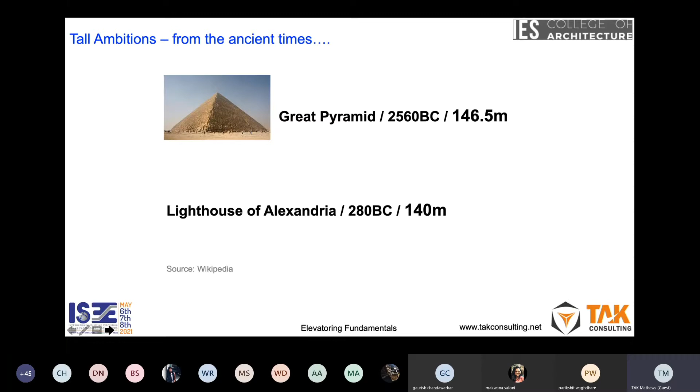And if you look at it from an Indian perspective, we have had tall ambitions too. The Qutub Minar at 72.5 meters was the tallest structure in India till Usha Kiran was constructed, which I believe is at 74 or 76 meters. But even at that point in time, around 1316 AD, there was another structure planned in front of Qutub Minar at 145 meters, which never got completed.

So we seem to have something that continues with us in history. We also have projects that we plan out in India even today which don't get completed.

So tall has always been the case. If you look at prehistoric times, there's a reference in the Bible, and it's referred to in other religious books too. They talk about the Tower of Babel, and what it says in the Bible is: 'And they said, let us build us a city and a tower whose top may reach unto heaven.'

So the point is that tall ambitions have always existed. Let's just have a look at how tall this building could have been. And because it's a prehistoric kind of scenario, we will have to refer to historians or experts as to what they have to say.

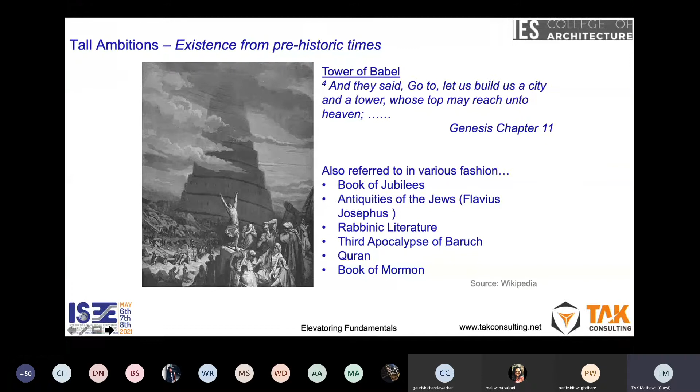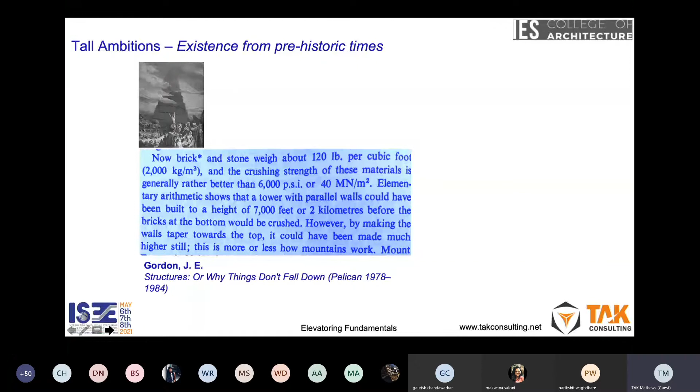So there is a book, Structures, by Professor J.E. Gordon, which says all tall things don't fall down. In his opinion, this building could have been about 2 kilometers high. And in comparison...

the Sky Mile Tower, which they are talking about in Tokyo, with completion expected in 2045 -- I don't know, I'm not too sure I would be alive at that time -- and the Kingdom Tower, which is under construction and was supposed to be completed in 2018 but is still not complete, are all much smaller. So again, the fact of the matter is ambitions have always been there. People have always been constructing.

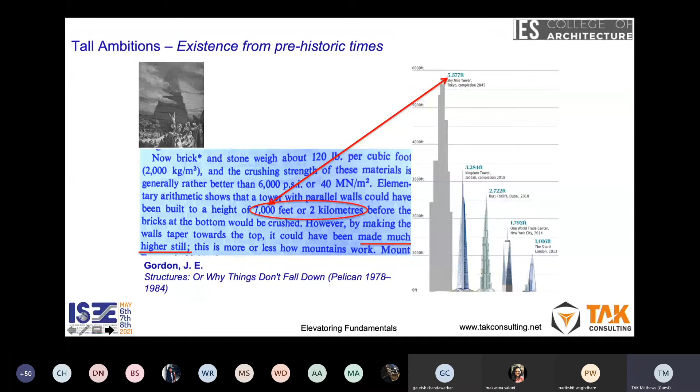So then the question that comes up is, what's the big deal in tall? Visualize prehistoric times -- they were talking about something that was 2 kilometers high. So what's the difference? We have the Qutub Minar, which was at 72.5 meters, and we have Usha Kiran, which went taller than Qutub Minar after close to 500, 600 years.

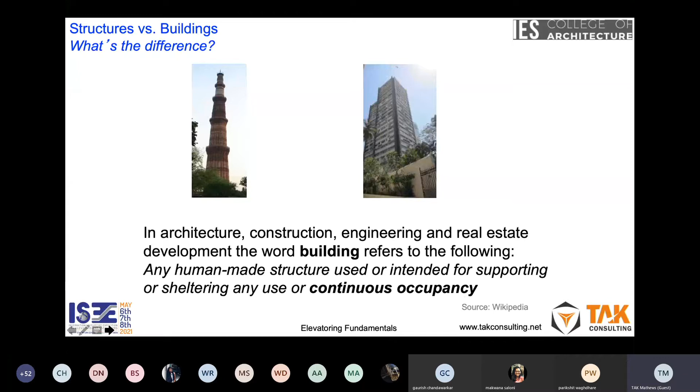So what's the difference? If you look at Wikipedia, it's a difference in architecture, construction, engineering. The difference between a building and a structure is that a building will support continuous occupancy. So a building is definitely a structure, but all structures are not necessarily buildings, because if it doesn't support continuous occupancy, it's just a structure -- just like the Qutub Minar, which is not expected to support occupancy. So what makes the difference?

Again, if you look at Wikipedia, it says that in the 19th century, buildings of over 6 floors were rare, as having to climb floors was impractical, which I think is an obvious scenario.

I do know that many colleges, many schools which are multi-storied, when it comes to elevators, they don't include the students, and the students are expected to climb up stairs, which probably is good for health, but not necessarily the right way of designing a building.

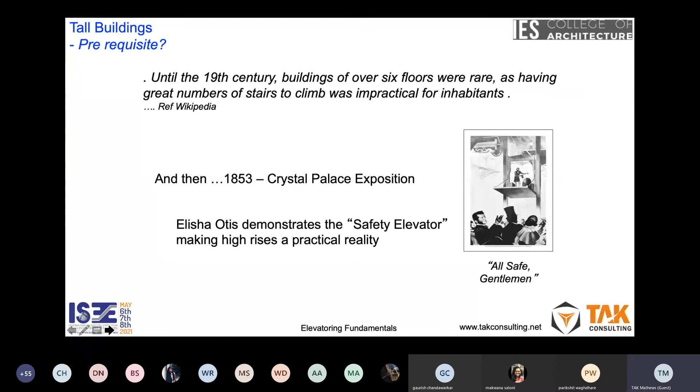Then look at what happened in 1853, Elisha Graves Otis invented the safety elevator. This is an exhibition which happened, and what he would do is get on the platform, cut the rope, and the platform would not fall because he had invented a safety mechanism to ensure the elevator doesn't drop. After 160 years, the same technology, the same approach, the same concept still exists for safety of elevators. For all practical purposes, it's Elisha Graves Otis's invention that made it possible to construct tall buildings, because then people didn't need to.

There is Ms. Chaudhary, I believe, who is asking for control of the screen. Should I? Hello, excuse me, there's somebody who's asking for control of my screen. No, go ahead. Yes, sir, please. Okay, you can see my screen, right? Yes, we can see your screen, go ahead.

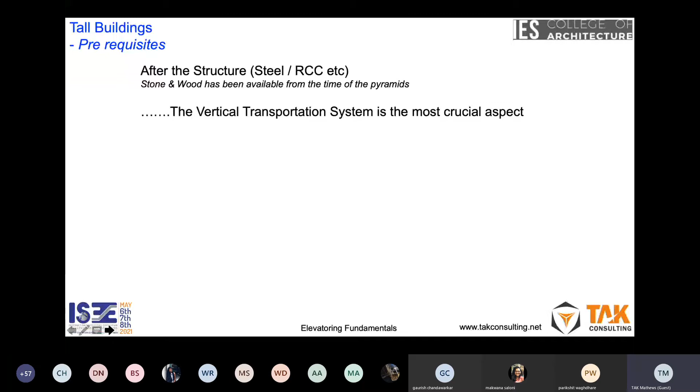So after the RCC and the structure, what is most crucial is the vertical transportation system. Unfortunately, and I say this from experience, I've been a consultant for the last 16 years, I sit through design meetings, and it's a sorry state of affairs where even toilets, horticulture, and landscaping get a higher priority than the elevators. As we go along, I will give you proof as to why I say this and why I would talk about this.

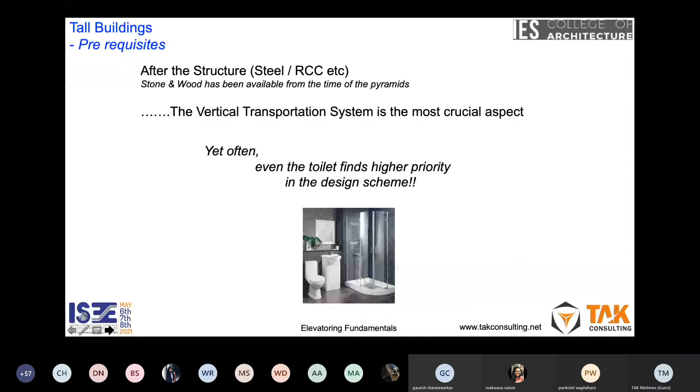I'm a civil engineer by qualification who's got into an electromechanical line, and I know for a fact that if your structure is not right, your foundation is not right, you do not have adequate reinforcement, your RCC is wrong, for all practical purposes you have to bring the structure down. I'm not talking about the old Mumbai area where you can put up a couple of scaffolding and keep the structure up. I'm talking about a tall building.

What would you do if your elevator core is wrong? Can you add elevator cores in a building? Again, I'm not talking about a small building where you put in an elevator between the stairwell or add something externally. I'm talking about a tall building. Invariably, the answer for both is that you have no alternative but to bring the building down.

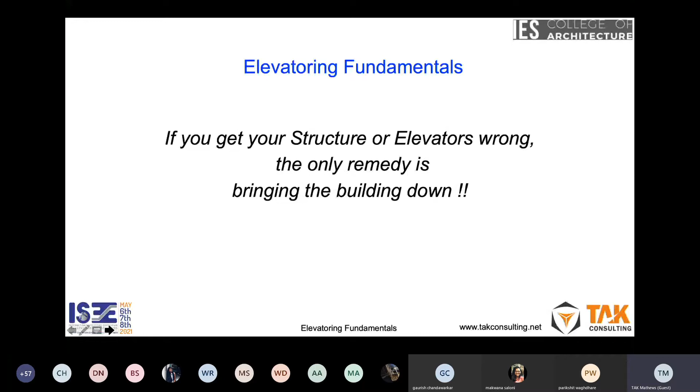So let's look at the cost of inadequate elevatoring. Over the last 6 months, and we do this often, we are approached with cases where people tell us that we have a problem with the elevators, there are long waiting periods, can you do something about it? And in 99.9% of the cases, we don't have a solution.

This is just to give you an example. These are 5 buildings we have been working on over the last 5-6 months, and the client got very upset with us because we didn't have a solution. Look at building 1, 2,700 population, the average waiting time is 323 seconds, that's 5 minutes. Now I know there are people who say, what is so great about 5 minutes? But if you were to convert that in a commercial building into time over an annual basis, you're talking about a cost of about 3 crores every year.

Now, these buildings we are talking about have been in existence for over 10 years, and this is fairly distributed over this city. I've just picked this city as an example. Look at the worst case scenario, 15 crores. 15 crores into 10 years is 150 crores. The cost of that building was probably only 500 crores. So the loss in terms of hours to the tenants, to the people who are there, is in multiple crores. We need to recognize that in these situations, there's really nothing that can be done.

I'm sure I don't need to elaborate as to which buildings these are, I'm sure you've seen them. In February this year, I was part of a panel discussion, and one of the questions I asked was, how many buildings in India actually have a design basis for elevatoring? We had a lot of discussion amongst the panelists, there were some thoughts, and finally we concluded that not more than 10% of buildings in India would have a design basis for elevatoring. More or less, everything is based on thumb rules.

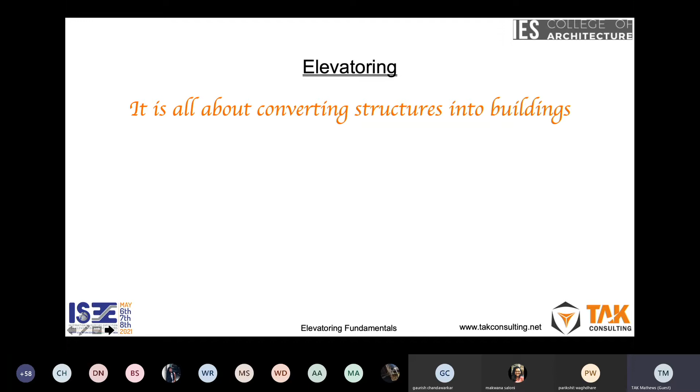Elevatoring is all about converting structures into buildings. Now, as architects, do you want to be just doing structures? Do you want to just build a Qutub Minar, or do you want a building? If you want a building, it is about elevators. And here ends my first lesson.

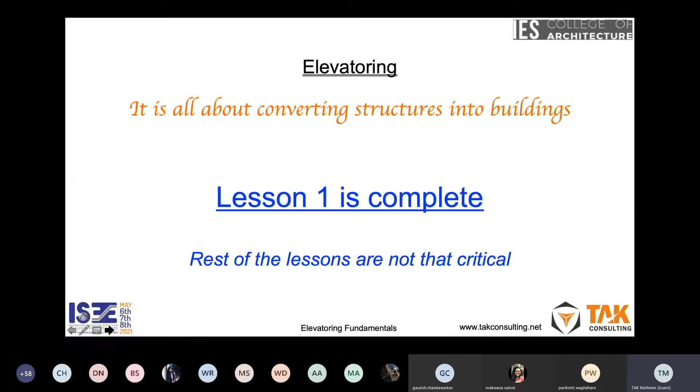If you were sitting face to face in a classroom, I would say that the rest of the lessons are not important. If this lesson has been put across, if I have managed to get this message across to you, the rest of it is not that critical. So if you're at home, you could probably turn on Netflix, the rest of the things are not that critical. This is the most critical. This is 99% of what I would be talking about today. For those of you who are still continuing, I'll get into a little bit more detailing.

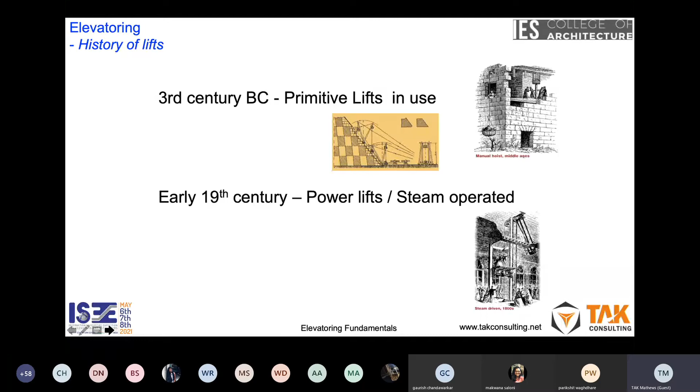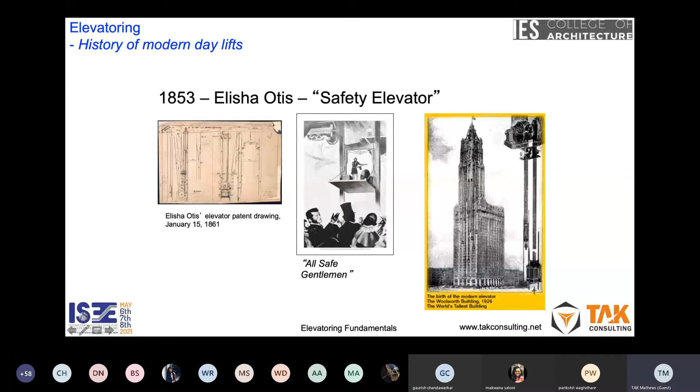History of lifts. Yes, we have had lifts before Elisha Graves Otis's invention. However, they were more for goods than people, because it was unsafe - if the ropes got cut or there was a failure, it would collapse. It is Elisha Graves Otis who made the difference. This is his 1861 patented drawing, all safe gentlemen, and that is where the skylines of this world started changing. There were hydraulic lifts around 1870, 1880, then electrical lifts. Everything slowly started falling into place after 1853 and buildings started getting taller and taller.

Again, a clarification - lifts and elevators are the same thing. The British say lifts, and because we are a British colony, an ex-British colony, we refer to lifts. So if you look at the standards, it's lifts. However, both these are synonymous, and in fact Otis would refer to them as elevators, Kone would refer to them as elevators, and most elevator companies would also refer to themselves as elevator companies and not lift companies. But these are the same thing, makes no difference.

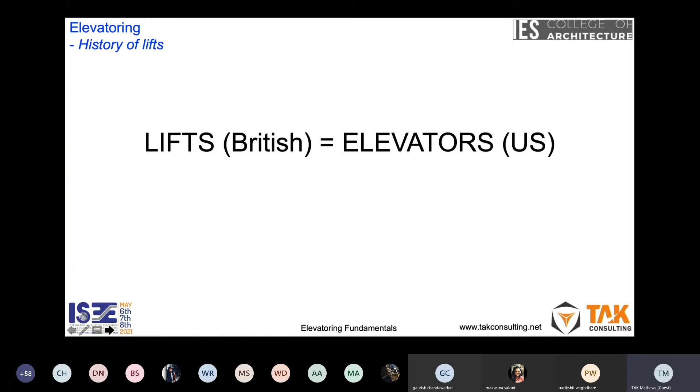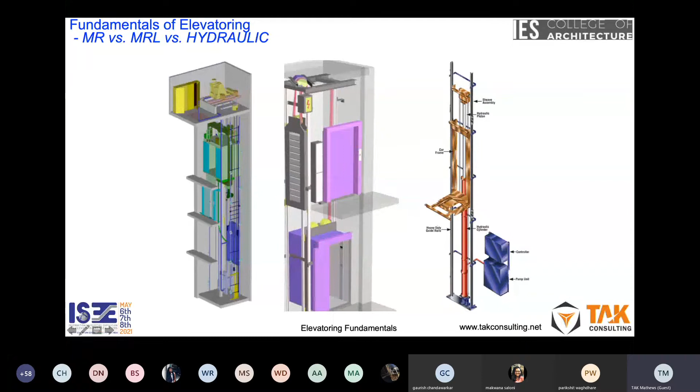Talking about just a few things - on the extreme left is what is referred to as a machine room elevator, where you have equipment tucked up in the machine room. In the middle is a machine roomless elevator, which is just about 20 years old in its invention. And then you have the hydraulic elevator. Now, the difference between these three, their application and pros and cons is something which is a one hour session which I will not be covering today. But it's essential that you understand what a machine room elevator means, what machine roomless is, and what a hydraulic elevator is - all three are very different in their approach.

Some of the components - I know you know the components, but the point I'm trying to indicate is that today, when we put together these components, or when you are designing an elevator or designing the elevator machine room, remember it is not just a question about the functioning of the equipment. We also need to remember that for the next 20, 25 years of the life of the building, this equipment needs to be maintained. So you also need to provide adequate space for the engineers or technicians to be able to maintain the equipment.

So for instance, if you were to look at this machine room, you'll see there's a lot of free space. Can I make the machine room smaller? To get the elevator operational, yes you could make it smaller, but to maintain it, you would need to have adequate space.

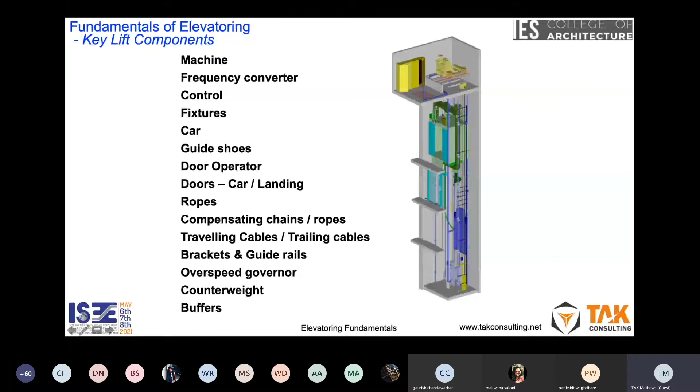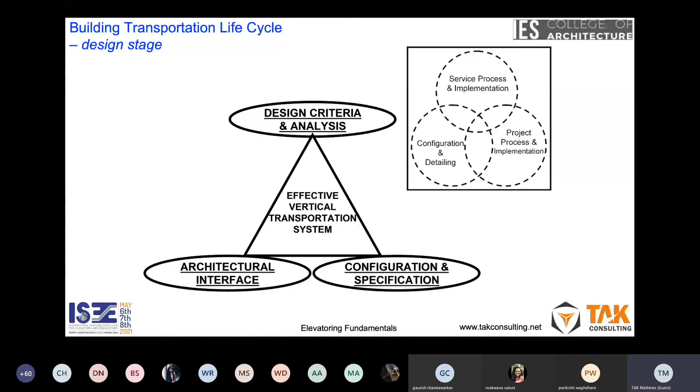So what we'll do is first talk about the design criteria and analysis. Again, remember what I'm talking about - we'll be talking about it from a surface level. We will not be able to go into significant in-depth discussion because of the time requirements.

So if you're talking about the detailing that is required, of course you need to define the building - if it's a hospital building, a hotel, a commercial building, or a multi-use building where you have residential apartments on some floors, a hotel on some floors, commercial - the entire approach is different. You need to be asking enough questions. So often when we get into a design, they say, why don't you give us a checklist? And I'm very, very hesitant to give checklists because checklists box in the answers that you would get. I would prefer a free-flowing discussion to understand what all is involved.

So if you were to talk about a hotel building - whether super premium, where is the location - all these things make a difference. Is it a single tenant or multi-tenant, and of course, try to anticipate the unknowns. There's always this question that comes up - but how can we anticipate the unknowns? But if you ask adequate questions, there are a lot of things that would come out. Could somebody have predicted COVID?

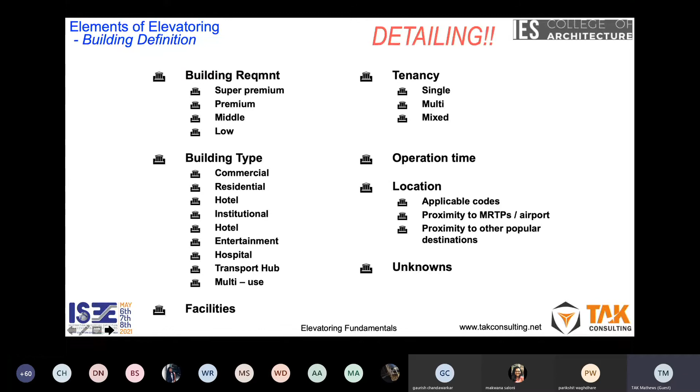Probably not, but there are many things that we can anticipate, and we need to define that. When we talk about population, the number is a crucial aspect, and that is where normally there is a huge gap in terms of understanding. We need to remember that there's a difference between the numbers you would consider for HVAC or floor loading and the numbers you would consider for elevators.

You need to understand the demographic profile, the cultural background. Suppose a building is a residential building being designed in the US, in Manhattan, for instance. It'll be very difficult for them to understand that in India, newspaper and milk get delivered to our doorstep. So if an architect based in the US with that Manhattan experience were to come and design for India, he would not provide for the service staff or the service requirements that we would have. So these are all things you need to consider.

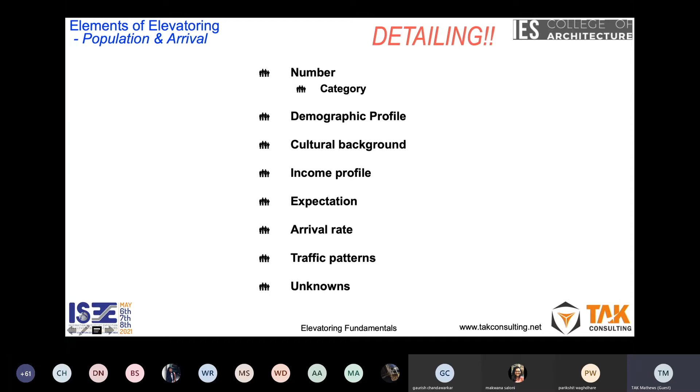Again, unknowns—you need to keep asking questions as to what all could possibly happen. When we talk about material and service, this is mostly ignored. What invariably happens is, okay, we need to provide a service lift or we need to provide something for a stretcher, so let us provide something. But that's not adequate, because you would need to check with MEP, check with the services as to what is the largest equipment in terms of volume and weight that needs to be carried up, and what other equipment do you expect to carry up into the building.

Now, the taller the building, the more difficult it is. Yes, here today we have Mathadi workers who will help carry stuff up, but if you're talking about 70 or 80 floors, even the Mathadi workers would probably have a problem. My daughter plays the piano, and on her 15th or 16th birthday, my mother presented her a piano, and we struggled to get it up into our 4th floor apartment. So these are the things you need to keep in mind. Remember, as I keep saying, if you've designed it wrong, you have to live with it for the life of the building.

Okay, now let's get into some parameters that are used. I refer to this caution—this is Dr. Gina Barney. She is probably 80 years plus, a lady who has devoted her life to elevators. She was an electrical engineer, and her book, The Elevator Traffic Handbook, is virtually a Bible for traffic analysis and design of elevators. And she makes it very clear that just because you've read the book, you will not become an expert. You need to spend time to understand the theory, which is very complex.

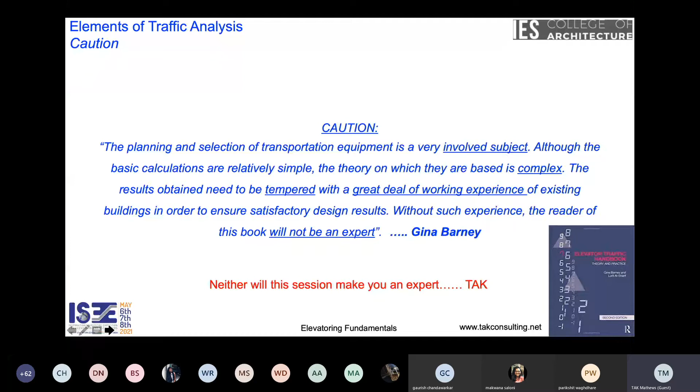It's not a thumb rule basis that you can establish elevators. It's not that you toss a coin up in the air and decide. It's not that you say that building had 3 elevators, so let me do 3.5 elevators here. No, there is a lot more that goes into establishing elevators. So I add a little to what Gina Barney has said—this session will also not make you an expert. It'll just give you an indication of the questions you should probably ask or what you need to be aware of when somebody gives you a traffic analysis report or design basis report for elevators.

So there are 2 things which in the classical mode are always talked about: handling capacity and interval. I do not know how many of you are aware of this, but let me take you through it. Handling capacity, simply put across, is what the elevator system can handle in a specified time with a specific average loading.

And the specific time interval is invariably 5 minutes. 5 minutes because it was a convenient thing - 2 minutes is too less and 10 minutes would have been too long. So 5 minutes is considered as a standard, and the average loading is considered to be 80% or less. Interval is the time difference between 2 elevator departures.

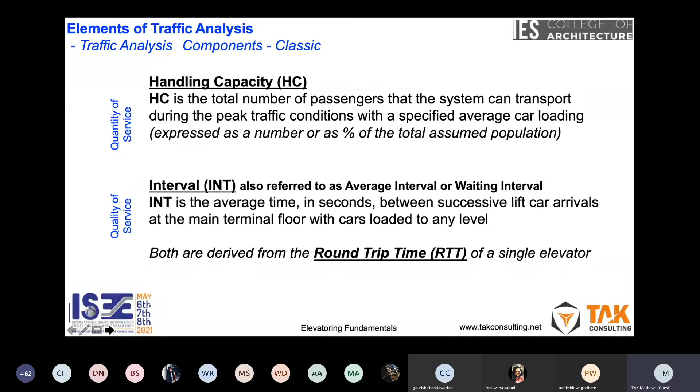We will come to that again, and recognize very clearly this is not average waiting time - this is the time difference between 2 elevator departures. Both are derived from the round trip time. This is the classic approach that has survived for more than 60 or 70 years now, and it is the only way we can do an apple-to-apple comparison between 2 calculations or 2 buildings.

So the round trip time formula - don't try to mug up this formula, try to understand the components that are involved, what makes the difference. So you have 2H. H is the average highest reversal floor, and S is the average number of stops.

So why is it 2H? It is that the elevator has to go up and come down, so the time that it takes to go up and the time it takes to come down. Now TH is the time that it would take for a single floor transit. So if the average floor is 60 and a half, it would be 60 and a half into the single floor transit time.

S plus 1 - S is the average number of stops, and 1 is that the elevator goes from the lowest floor, the acceptance floor, then goes up and stops at all the various floors, and then comes down. So that is the S plus 1, and TS is your door operating time and the loss on account of each stop.

Then 2 into P into TP. P is your average passengers that are carried, and invariably it has to be 80% or less. One, it is from a formula perspective. Second, we need to remember that when we talk about elevator loading, we are talking about 68 kilos per person. So somebody like me is definitely more than 68 kilos, so if you were to design on 100%, you'll invariably have a problem.

Now the 2 into TP, the transfer time - the 2 is people going in, that is 1, people coming out, that is 2. So that is the 2P. So you recognize, the more number of floors, the higher is going to be your impact on account of H, higher is going to be the impact on account of number of stops. And larger the car, higher is going to be the impact of people ingressing and egressing from the car.

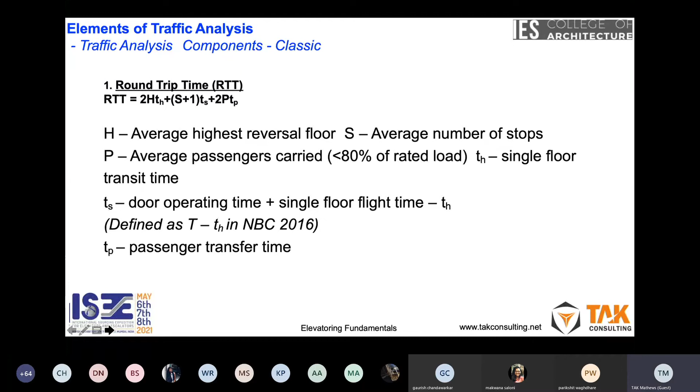So H and S are statistical functions. Again, please don't worry too much about this formula as such. If you're ever interested, please refer to Gina Barney - her book is pretty detailed. In fact, I keep saying even today that if I have a little bit of a problem sleeping, all I need to do is pick up that book and start reading, and it puts me to sleep very fast.

Again, what you need to remember is what are the implications. So higher the building, the more number of stops, the bigger is the impact of H. Higher your car capacity, bigger is the impact of the probable number of stops. So for instance, if you have a ground plus 1 building, the number of probable stops is 1, your H is going to be 1. If you have a 1 passenger elevator, again your probable number of stops are 1.

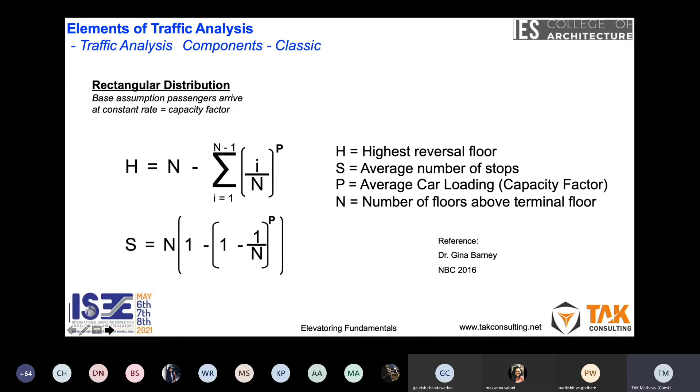So you need to recognize that these are all an iterative process - more stops, you have a problem; larger the capacity, you have a problem. And you need to ensure that this is balanced. H and S, obviously, it is not a function of speed. It is not a function of your door opening or door closing time, because it is just a function of your average car loading and your number of floors.

So if you were to take the number of floors as 20, and suppose we have a 10 passenger elevator with average loading at 80%, you have 18.2 possible stops. Reversal floor will be 18.2, and your average number of stops will be 6.7. So irrespective of who calculates it, H and S will not vary because it's something that can be extracted from our table. There could be differences on the rest of the components.

Because I could anticipate and say that, well, this building is of older people so they will take more time to ingress or egress - maybe it's an old age home. Or on the other hand, it's a college institute where people will be snappy in getting in and out.

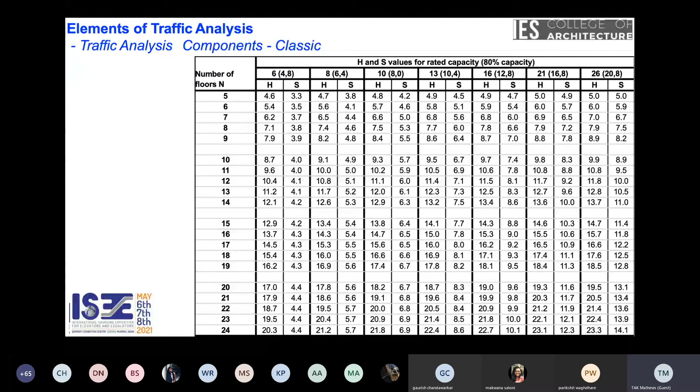So there could be a difference in your time components or your time assumptions, but it cannot change. This particular aspect cannot change.

So from round trip time, where do we get into? We do the up peak handling capacity. It is 300, 300 seconds, that is the 5 minutes divided by round trip time, which means in 5 minutes, how many times can the elevator go up and down into your average loading, into L. And this is expressed as a percentage of your total population.

And your interval is the round trip time divided by L. Now, what is key here is that, again, remember, these are statistics. These are all permutations, combinations, probabilities that are involved. It is the number of lifts in the group. So if you have 8 lifts in 2 different corners, your interval is not round trip time divided by 8, but it will be round trip time divided by 4.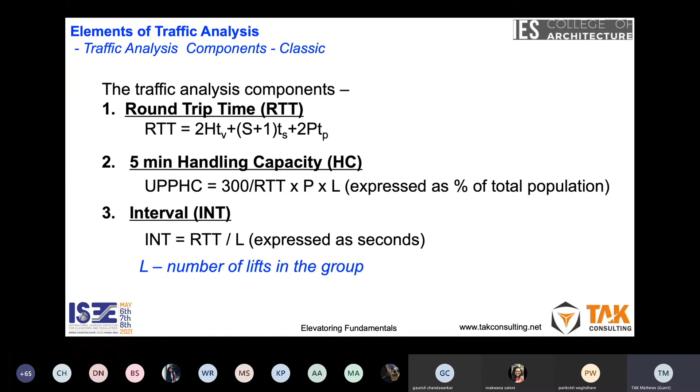Keep this in mind when we often have had this problem where we come up with a recommendation saying that we need 8 elevators. The architect, from a perspective of how the building should look, divides his 8 elevators into 3 different corners or 2 different corners, and then we end up having a problem because it doesn't give you the same results.

So it assumes it's a pure up peak. That means the people are picked up on the ground floor and then they are rushed up to the upper floors. They drop off at the upper floors and the elevator rushes back immediately. Even if there are 3 people who decide to go from an upper floor to an intermediate floor, we have a problem. It's assumed as a rectangular distribution formula, which means that every time the car is filled to an average of 80%, which again we know doesn't happen.

It's always a bell curve. Floors are equally populated - again, that is not the case. And the floor heights are equal.

So the reason why I'm saying this is you need to remember that when you do the traffic analysis, there's already an idealism that is assumed. So if at that point of time we say that, okay, let us compromise a little on the basis of the traffic analysis - like say, for instance, I need a handling capacity of 10% and say, no, we are okay with 8 to 9 - we need to remember that the 10 itself has been arrived at based on an ideal assumption.

Things that we need to remember: handling capacity is what the system can handle. Arrival rate is what will actually happen in terms of people reaching the building. Unfortunately, in the elevator industry too, there are people who interchangeably use this. Remember very clearly that what we need to achieve is a system that can handle so much, and so many people arrive, and what we should try to do is try to ensure that this is matched.

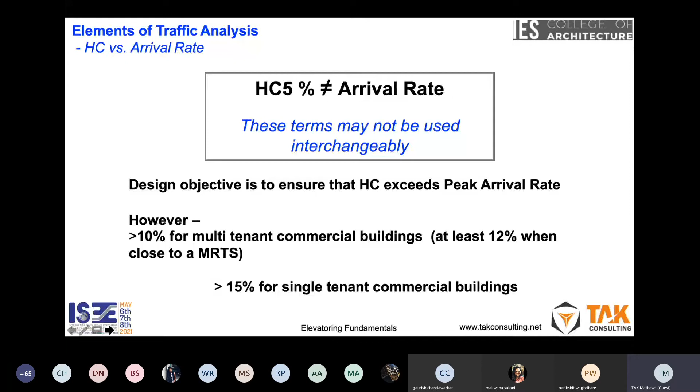And if it's a single tenant building, definitely it has to be more, because the possibility of a diverse arrival rate is going to be significantly less. So these are things - I'll just come to this particular thing in terms of what everybody asked for: a quick look into interval.

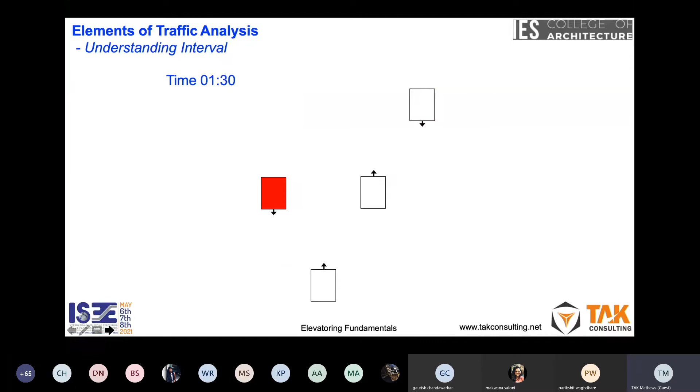Remember, it's again a statistical function. So if you focus on the red car: 30 seconds to go to the halfway point, 1 minute to get to the top point, and then 2 minutes to come to the bottom. So if you were to look at it from that perspective, the round trip time of the red car was 120 seconds. Because there are 4 cars, you divide by 4 and you get an interval of 30 seconds.

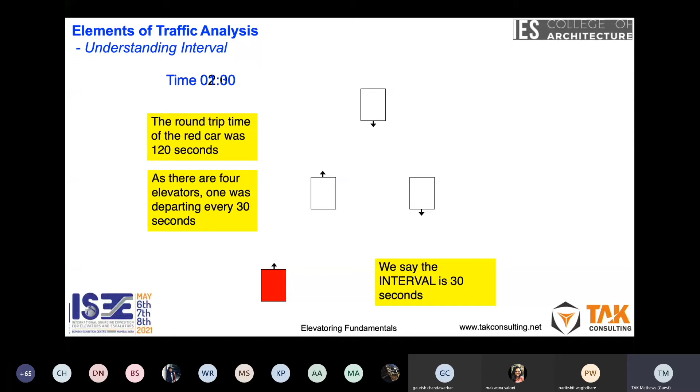The reason why I'm showing this is for you to understand the difference between interval and average waiting time. The interval is the time difference between 2 elevator departures as an average. So if you were in a scenario where you didn't have enough elevator cars, you could have an interval which is very good, is awesome, but then you have an average waiting time which is higher, with people still waiting in queues. The classic example we have would be the Cuffe Parade and Nariman Point area, where you have smaller cars and the interval is very fast, elevators come down, but you are still waiting in a queue.

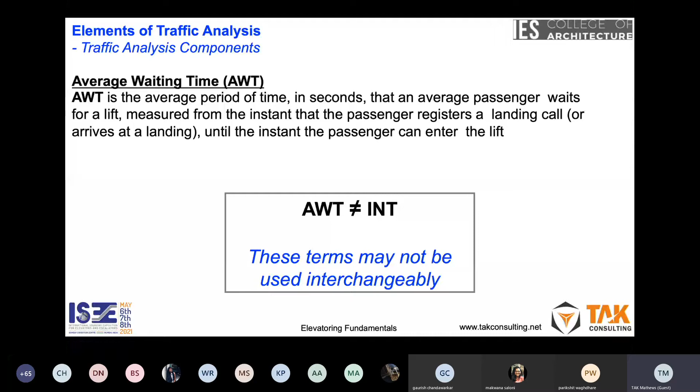We need to recognize that the average waiting time is not the interval. This is often confused. Interval is the time difference between two elevator departures, while average waiting time is the time somebody will have to wait after the first button has been pressed - if it's a conventional system with up and down arrows - or after the person has arrived at the landing, assuming the button has already been pressed.

Just to understand how it works, we calculated the conventional classical way - the handling capacity and the interval. Now, how does that apply to a person?

So if we have two people arriving, Raghu arrives, Anita arrives, and they push the button, the elevator comes in. If you look at it, Raghu's waiting time is larger than Anita's waiting time. This is what invariably happens. Anita should be a happy lady because she had to wait very little. But Raghu's time to destination is lesser than Anita's, because Raghu is on a lower floor, and Anita's time to destination is larger.

So the reason I'm showing this is because we might do the calculation and find that we have a good acceptable handling capacity, a good interval. I do a simulation and establish what the average waiting time is, and it looks good. But we also need to keep our eye on the ball in terms of the time it takes to reach a destination, especially when we are talking about tall buildings.

So everything falls into place, but you still need to go back and check how much time the person takes to reach the destination. And often, for a taller building, that might be your clue for establishing the elevator speed, not just the handling capacity and the interval.

The relationship between interval and average waiting time is not understood at all, and people interchangeably use it with serious consequences. I gave you an example of Nariman Point. If you were to say that the interval and the average waiting time at Nariman Point are equal, the answer is no. The interval is good because the elevator cars are smaller, but the average waiting time is much higher because people still wait.

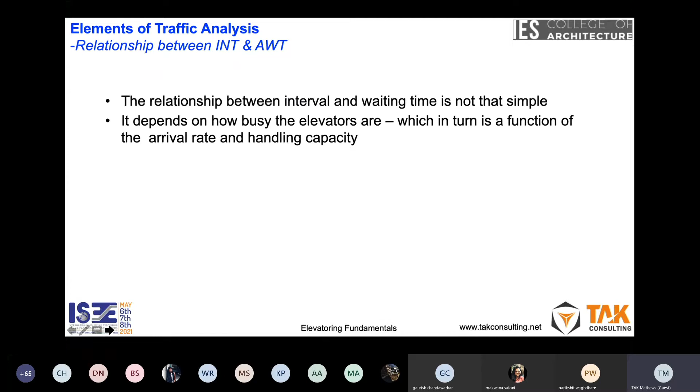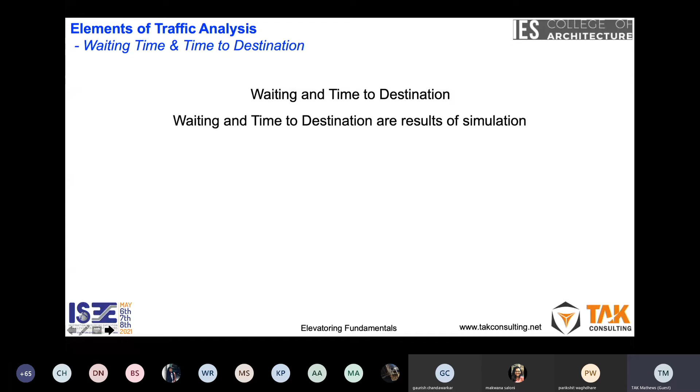The way to arrive at your waiting time and time to destination is through simulations, and today you have excellent simulation packages. However, we still need to work on handling capacity and interval as our base. For the simple reason that when you talk about simulations, it's not based on formula - it is based on algorithms, which could vary depending on the software person. And with software, the problem is garbage in, garbage out. In any case, we need to remember that assumptions and the right interpretations are key.

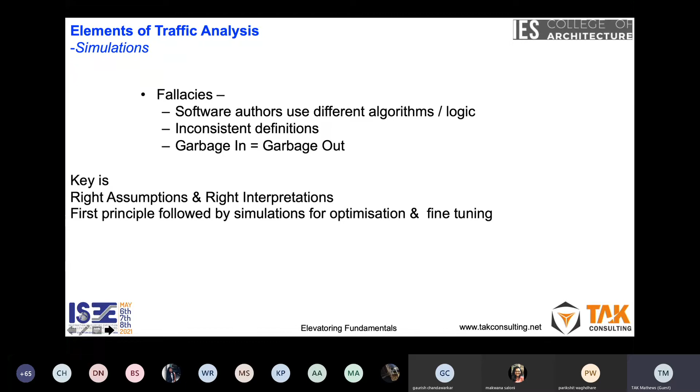So again, looking at the National Building Code, we have a process laid out which, I understand, has now been copied by some code writers in Europe. You go through the whole process: establish the building, set out the target parameters, do the peak analysis, establish the number of elevators, then do an optimization. You fit it into the building and see if the areas have changed. If the floor area has not changed, you're good to go. If it has changed, you'll have to go back. This iterative process has to always be followed.

I have often been asked, but we are still at the conceptual stage of the building, so we have no idea - just give us some idea of elevators. For a smaller building, it's possibly workable, but the taller the building, the more difficult it is to do, because the consequences could be huge.

If you're talking about a building of, let's say, 40 or 45 floors, and we have to establish the number of elevators, a population difference of 150 could mean an additional elevator. On the other hand, if it's a smaller building, a population difference of 300, 350, 400 would probably not make too much of a difference. So there is nothing like an estimated number of elevators for a conceptual design. From the first instant, the taller the building, the more you have to get into detailed calculations to establish what you require in terms of elevators before filling it into your architectural plans.

The crucial input is population. We need to be very careful about it, because if your population assumption is wrong, whether overstated or understated, both ways we have a problem. If you look at the National Building Code, it does give you some guidelines, but it's still best that you understand what the building requirement is.

Just NBC 2016 recommendations: for multi tenancy the minimum required is 10 to 15%, while single tenancy is 15 to 25%. The reason is that in single tenancy, the diversity of arrival rates would not vary as much as in a multi-tenancy. The recommended average waiting time for a premium and a regular building is also different. For a residential building, handling capacity for high-end is greater than 8%, mid-end is 6 to 8%, and low-end is 5 to 7%.

Those of you who know NBC 2005 know we had a standard handling capacity for all types of residential buildings, which was 7.5%. We did this breakup because we realized your density for residential buildings, depending upon the level of the building, could vary. A high-end building at 7.5% with lower density would throw a lesser number of elevators, while a low-end building with higher density and higher average handling capacity would end up with more elevators than required. So we've done a breakup on it.

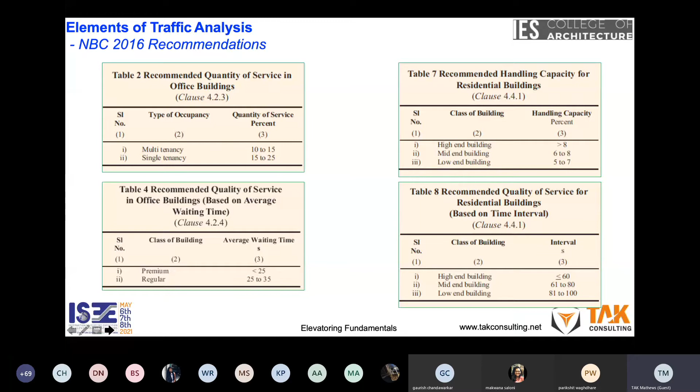Interval has been defined as 81 to 100. Please remember clearly, this 81 to 100 is not your average waiting time, it is the interval. So your handling capacity has to be met, and if you have this kind of interval, you are okay. But for a high-end building, if you have an average waiting time of more than 35-40 seconds, your resident is going to be very upset.

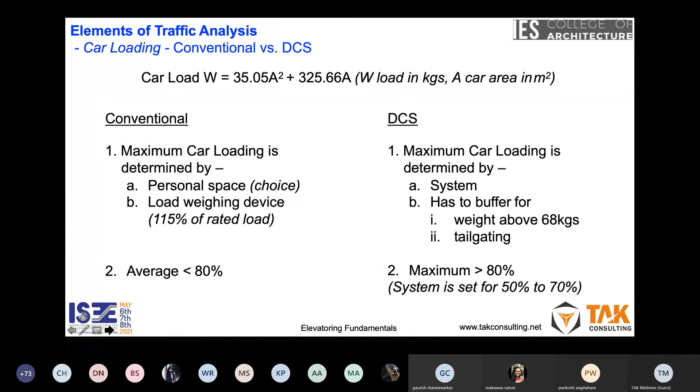However, do not worry too much about it, but remember that in destination control, your maximum car loading is more than 80%, while for conventional, your average car loading is 80%. So keep this in mind. You do not always have an advantage with destination control systems. The reason I'm saying this is that as you start working, somebody will say, okay, with destination control I'll take care of the whole thing. The answer is no, it doesn't work.

We had COVID coming up, and I conducted a number of sessions during this period, and there was a request saying we need to change the National Building Code to account for the pandemic scenario. My response was that if we have designed the building well from the first instant, COVID or no COVID, we do not have a problem.

If the building was designed at 12.3% handling capacity, even in the worst case scenario where you can load only 4 people into a 20-passenger elevator, you'd still have a waiting time of more than 2 minutes, which is still bad. But if you have a constraint on the number of people that can go into the elevator, you obviously have a constraint on the number of people in the building too. So if your building has been designed well, COVID or no COVID, you do not have a problem. On the other hand, if your building has been designed badly with 5.5% handling capacity, you already have a problem, and with the COVID scenario, your problem gets escalated even more.

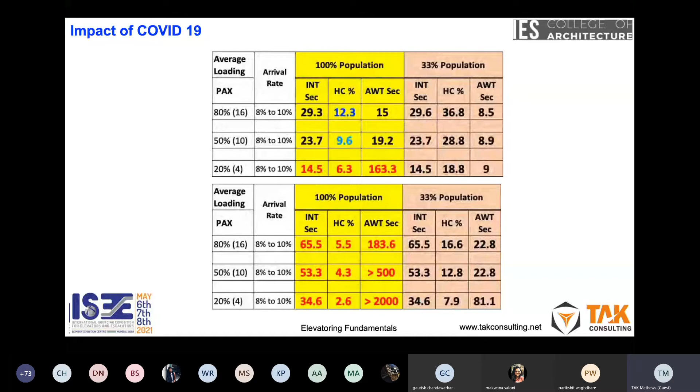So there is really no need to change the National Building Code as far as this is concerned. All we require is that we follow the National Building Code norms. Some of the errors that happen are people ignoring the criticality, missing out on population numbers, and ignoring the NBC 2016 provisions. Almost every other project, we come across architects who say NBC 2016 is just a recommendation, so we will not be following that.

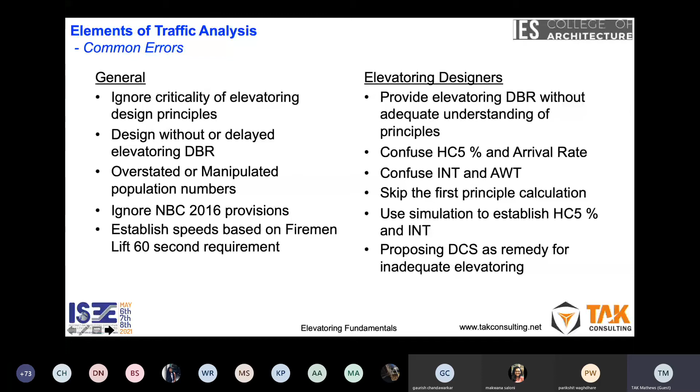Unfortunately, even when you look at it from an elevator company perspective, many of them do not understand the fundamentals. So the whole complex situation is we end up with buildings that are badly under-elevated. Designers and developers who don't allot the priority required for elevators see it as a nuisance. Combined with people from the elevator industry who also don't understand it, we end up with a very critical situation.

Once you have established a number of elevators, you need to do the architectural interface. Pay attention to this clearly: when you talk about elevators, it's about the number of stops and openings. We normally say if it's ground plus 7, it's a 7-story building. But remember, for elevators, the number of stops and openings need to be clearly mentioned. So for a ground plus 7 building, it is an 8-floor building, not a 7th floor building.

Remember that. Dimensions of hoistway: width into depth. Width is when you look at the hoistway left to right, with your arms stretched out. Depth is perpendicular to where you are standing. Unlike architectural drawings, where it depends on horizontal versus upright, for elevators it's always defined as width into depth. So if you are doing an X by Y, always remember it is width into depth, not how the hoistway is positioned on your drawing.

On the other hand, if you're just showing the dimensions, there's no problem. But if you are showing X into Y, it should always be width into depth. I've faced situations where architects have given a dimension based on how it appears in the drawing. We brought the material to site and realized it didn't fit because the way it was put across was different.

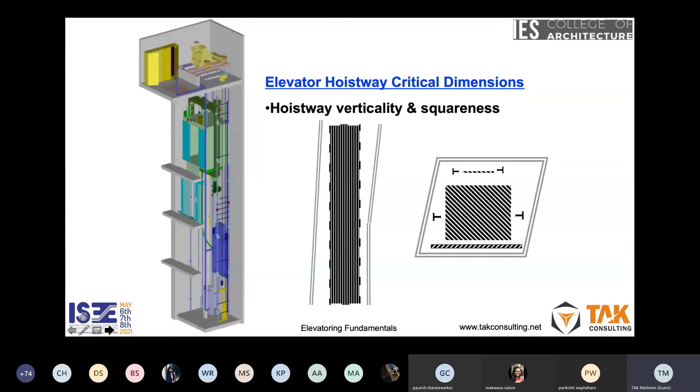Remember there are rough finish entrances. So if you want a taller door or a taller car, you need to keep in mind that there is other equipment that requires to be maintained. So if your door height is 2100, a clear opening of 2100 won't do. It will need to be more.

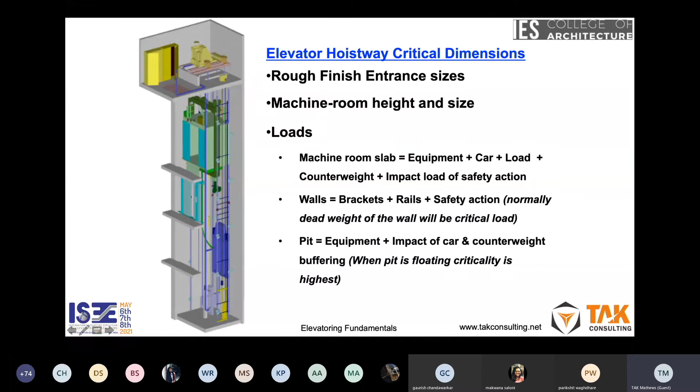The loads on the machine room are a component, a function of the various equipment that goes in. Walls normally tend to be the dead weight, but we still need to be careful because there are brackets, there is rails, there are safety actions that could happen. Similarly, a pit again has loads that we would need to be aware of.

Car dimension and shape - we have an FSI-driven design process that happens. So to get that free FSI, they say, okay, let us have a deeper car so that we get the entire space below. We need to remember that a deeper car is inefficient. Murphy's law will invariably apply, and the person who will get out will always have to be the person at the back, which means everybody has to troop out and then troop back in.

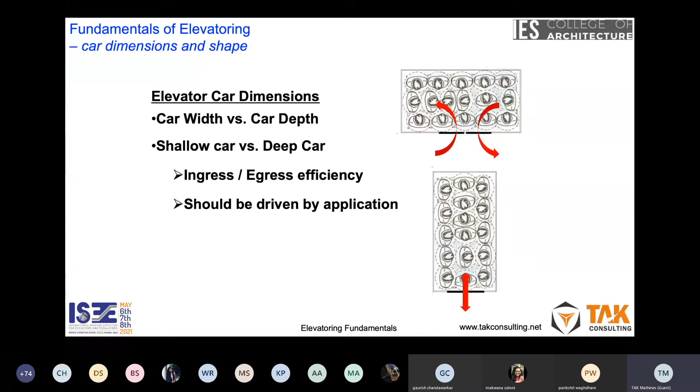Remember our formula of 2 into P into TP. When we are doing the analysis, we are assuming that a person will enter in and will ingress and egress only once. But if you have a deeper car, the possibility is that there will be more number of ingresses and egresses that happen. So keep that in mind. Yes, FSI is all good, but remember the 150 crores that we did analyze and say that if your elevating is bad, the complications that are involved.

The car area is defined by a formula, and the way it works is that the larger the car, the lesser the area per person - it is not linear. The idea is to ensure that the car doesn't get overloaded, and this formula is applicable whether it's in the US, Japan, India, or Europe. This is the formula that comes in, and these are the things which normally decide your hoistway dimensions.

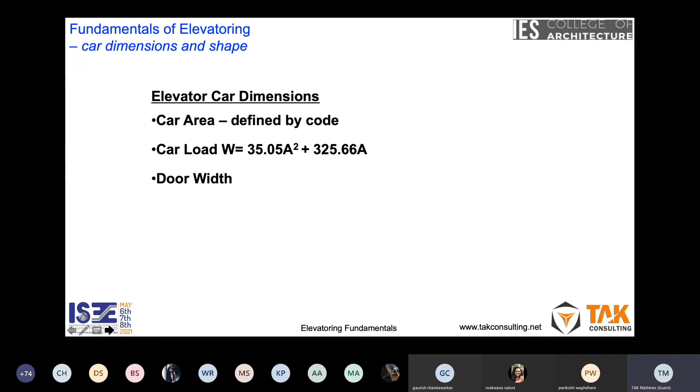In terms of how you position the elevators, remember what I said. If 3 elevators are required, there are 3 elevators in a group. Bear this in mind, and they have to be such that you don't need to be PT Usha jumping over hurdles to be able to approach the elevator that comes available for you. This is again from the National Building Code - if you have 8 elevators, I would strongly recommend that on your main floor you should have it open from both sides, because if you have 8 elevators, the crowd is that much larger and it would need a larger lobby. But the arrangement is very, very crucial. With destination control you have a little bit of flexibility, but the closer the elevators, the better they are for grouping.

So we don't talk about grouping - this is a building that is already existing in India somewhere, and in all the wisdom, this is how the architect has done the hoistway. You can see from the way the hoistways have been done - first of all, 2075 into 1925. Clearly it's a wrong way of doing it. It should have been 1925 into 2075. Incidentally, we were the consultant on this project after the building was two-thirds of the way up, and I was told the hoistway was 2075 by 1925. I made the specifications, and then I got the drawings in hand. I realized that the dimensions given to me were wrong.

So error number 1 is in the way the dimensions have been given. Error number 2, this is a 40-floor building, and if you have a hoistway of 1825, eventually you will effectively get a hoistway which is about 1750. In this case, the construction accuracy was so bad that 1825 actually became 1600.

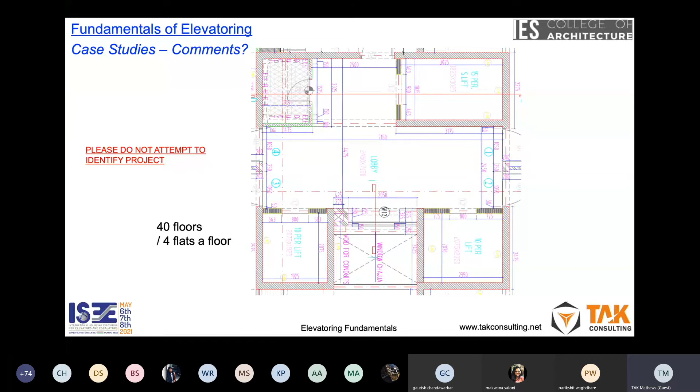1600 is what we managed to get as an effective hoistway size. It's obvious that not too much thought had gone into what was required in terms of elevators, because grouping these 3 elevators together is difficult. If you look at the hoistway sizes, you can see that these have all been fixed to accommodate what is convenient to everything else that has been designed. After everything was designed, suddenly somebody decided, okay, we need elevators too, and then they put them in wherever they could fit.

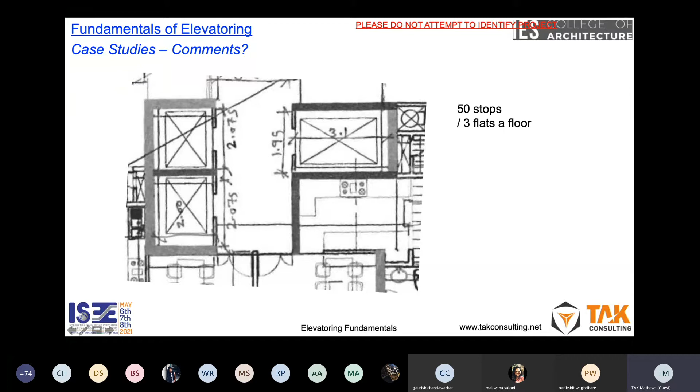This is again a building which we refused to work on. This is how the drawings were given to us, for a 50-floor building. 1.95 will obviously turn out to be 1.75, and the way they had given me the drawing and the way they were constructing the building, we realized there wasn't too much seriousness, and for a 50-floor building, this was grossly inadequate in terms of elevators. This building is complete now, and I keep a tab on it, and I understand the residents are very, very upset with the developer, because they invariably have problems with the elevators. Capacity is less, hoistway sizes are less, the elevators are inadequate, and they really do not have a calculation for deciding on the number of elevators.

So for tall buildings, it's a very tall perspective. Always bear in mind that the complexity is exponential. I had a developer who had done a lot of 10-story and 15-story commercial buildings, and now they are doing a 42-floor commercial building somewhere in India. Finally, we had to excuse ourselves from the project, because their only way of looking at elevators was saying that, in the 10-story building we put in 3 elevators, so for a 42-floor building we should be okay with 9 or 12 elevators. While our calculation was showing that you required 20 elevators.

His 10-floor building he had done at 1.5 meters per second. So he said for the 42-floor building, we should be okay with 4 meters per second. Our requirement was a minimum of 6 meters per second. So we need to recognize that the complexity is exponential.

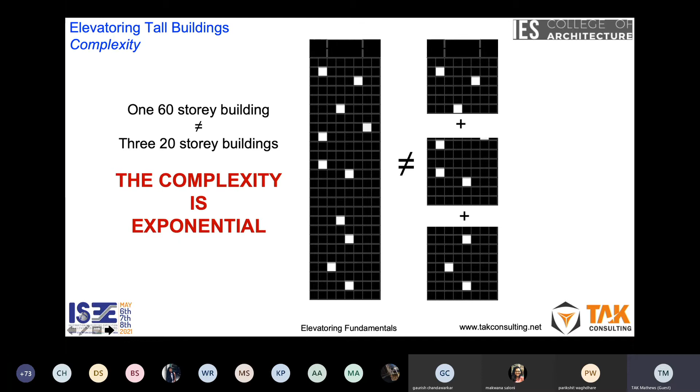An example I would give is, if you had to go from here to Delhi, you would either take the Rajdhani or take a plane. You would not venture out in a car or an auto rickshaw. Unfortunately, in many instances, this is how we approach buildings. We need to recognize that as the building grows taller, your core will eat into the building. In Burj Khalifa, I understand the core for elevators and services accommodation takes about 50% of your footprint. This is something you cannot do anything about. The taller the building, the more you require in terms of elevators. And what the developer requires in terms of larger floor space and what you require in terms of elevators is conflicting.

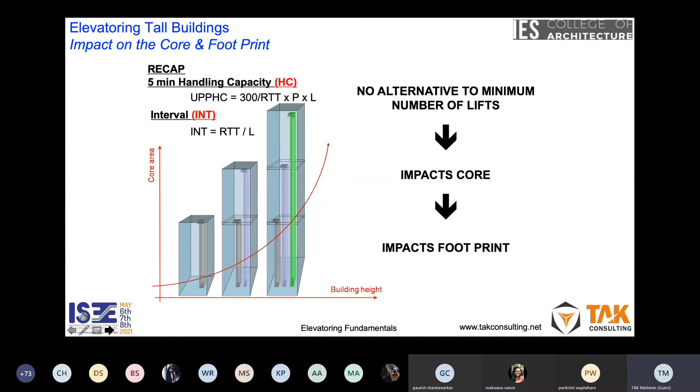Remember this formula: as the building grows taller, you need to look in terms of a fast train, local train, vertical zoning. So if you had to take a plane to Delhi, you would take road transport to get to the airport, and you would not expect the plane to come to your residence. Or if you had the Rajdhani, which starts from Bombay Central, you would go to Bombay Central using some other means of transport, and then you would go. So typically, you would not have elevators serving all the floors.

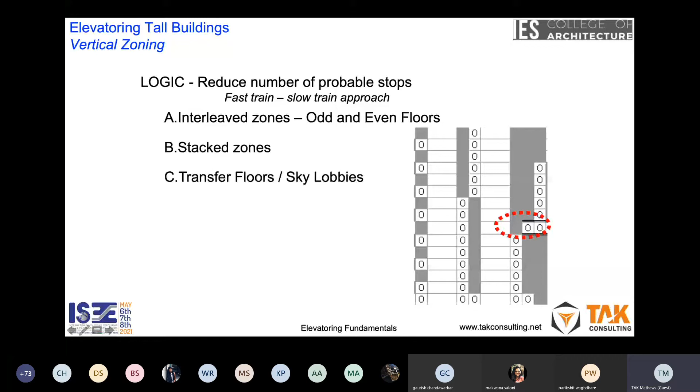I'll give you a few examples of what could happen. You would internally split the elevators, you would have sky shuttles. Rather than just describe this, let me show you a few examples. You could have sky lobbies, elevators serving only upper floors or lower floors, you could have stacked zones, which is exactly what happens in Nariman Point or Cuffe Parade today. That's not a great idea, because people at the lower floor will push both buttons and decide to walk one floor below.

Some of the equipment available is a double-deck elevator, which is two floor elevators attached to each other. Typically, for this to work, the floor-to-floor height has to be fairly exact. Though you do have an option of flexible double deck, you need to remember that there is a time involvement.

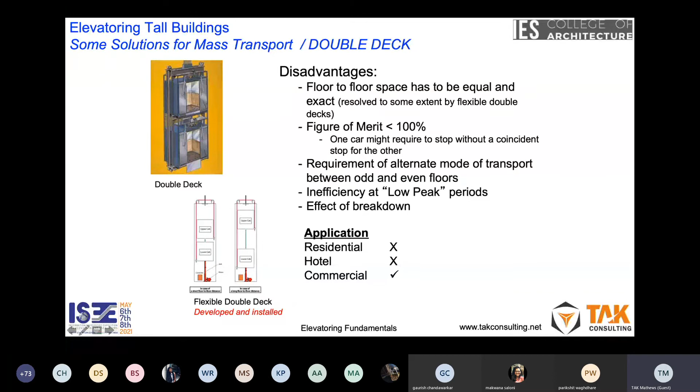The moment you have this kind of flexibility, it takes even that much more time for your stops and starts.

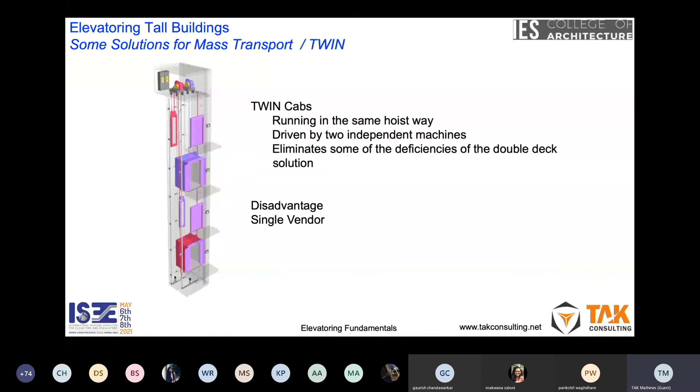There is something else called a twin, but unfortunately the twin is two different machines in the same hoistway. Unfortunately it is still a single vendor who has got it, so it has not become very popular. In addition, there are some violations of the code which happen because it has to be electronic safeties, and your standard safeties do not always work.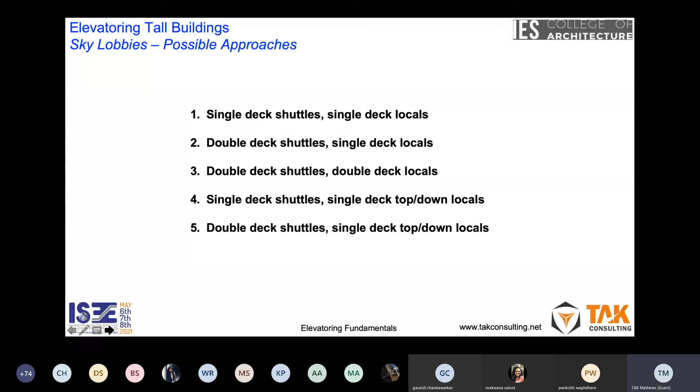Okay, some of the things we talked about - single deck shuttles. So for taller buildings, some of the options are single deck local, double deck shuttles, single deck locals. Instead of just going through it, let's look at the examples.

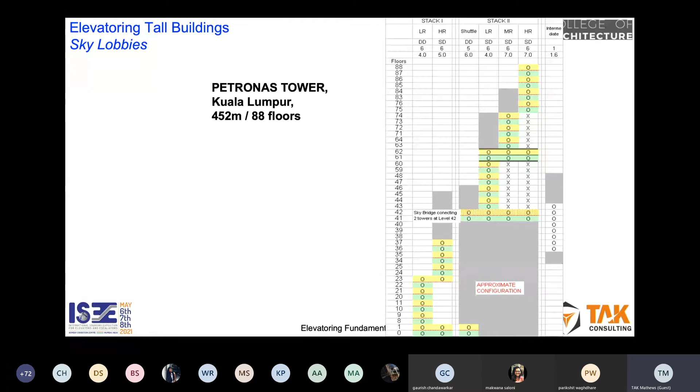If you look at the Petronas Towers, it's a total double deck alternative. So if you had to go, let's say, to the 61st floor, you would express to the sky bridge here, and then take the elevator, the lower or the upper car, to go to the floor you require. When you have this kind of double deck situation, you obviously will need alternate means to travel from your lower floor to the upper floor, because the upper floor car will not come to the lower floor. So escalators would also need to be provided.

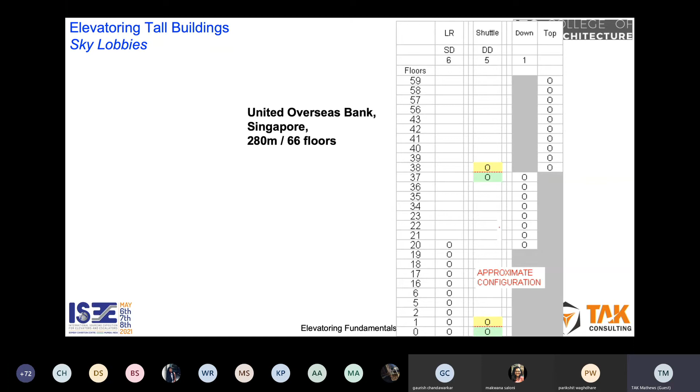This is the United Overseas Bank. Again, if you want to go to the 56th floor, you would take the express till here, and then transit to these elevators to go to the 56th. And here, if you want to go to the 36th floor, you would take this and then take these elevators. This arrangement is not preferred a lot, for the simple reason that going down, people often feel bad that they've had to go up to go down. But sometimes this is the only thing that works out.

Shanghai Financial Tower, again, is a double deck alternative where you have to take double decks to get to your particular floor, and then from there again transit into double deck elevators.

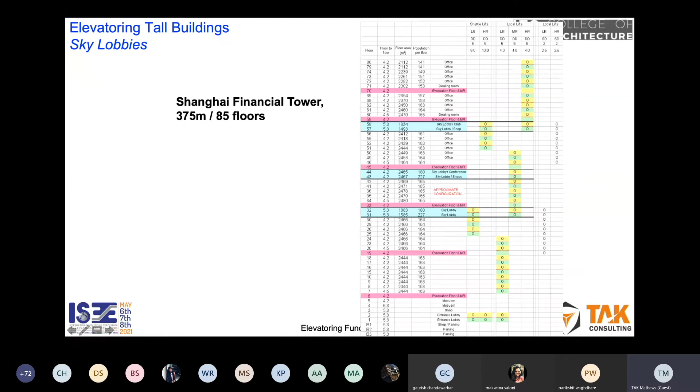So with speeds, there's always a problem in terms of acceleration and deceleration. There's a limit - it's not like we can have any speed. Obviously everybody wants more speed, and today the fastest elevator is 20.5 meters per second, and remember, that's only in the up direction. Followed by that, the 16.83 and 10 meter per second elevators have been in existence for a very long time.

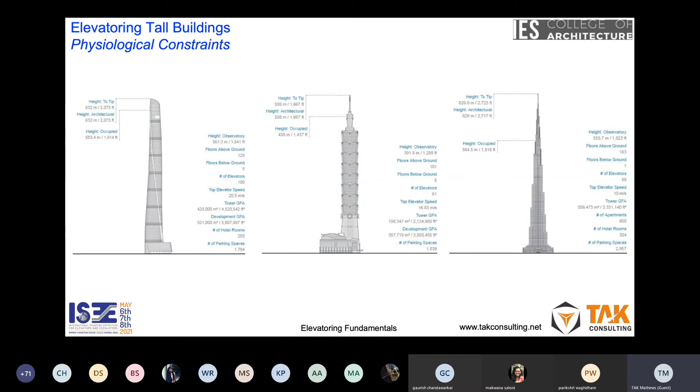Even in the Burj Khalifa, you don't have a single elevator that goes through all the building - there's always a transit for everything, so there's no elevator that goes through all the floors. One of the primary reasons for this is the weight of the ropes. For Burj Khalifa, some of the elevators which travel the longest distance, the weight of the rope is far in excess of the weight of the car.

So when we talk about buildings, we talk about construction accuracy - always remember how critical that is. Squareness has to be considered. There's also the wind tunnel effect: the higher the speed, if you have a closed hoistway, you have a problem. So always either provide for significantly larger hoistways, or ensure the intermediate walls are not there - the partition walls should be perforated, or not there at all, and you just put in steel beams for your brackets. In any case, remember, do not refer to standard hoistway dimensions. Depending upon the building, for a tall building, you will need to get into exact details.

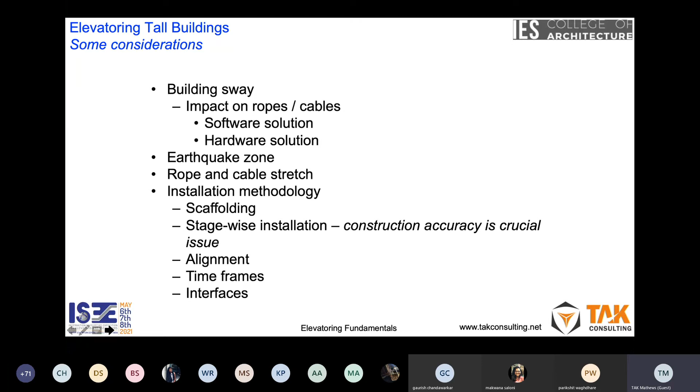Other technical things that you need to consider: the building sway, you need to ask about that. Earthquake, what is the earthquake zone? You need to be looking in terms of what the installation methodology is. You need to plan on what it is. It's not just like a smaller building. You really will need to plan on how you do it.

Building floors, the finishes. If you're going to be doing wet cladding with architraves, it's going to be even much more difficult for a taller building. So if you're going to do cladding, let's say, on the 50th floor, remember that slurry goes all the way down. I would strongly recommend that it should be dry cladding, that you look at that kind of situation.

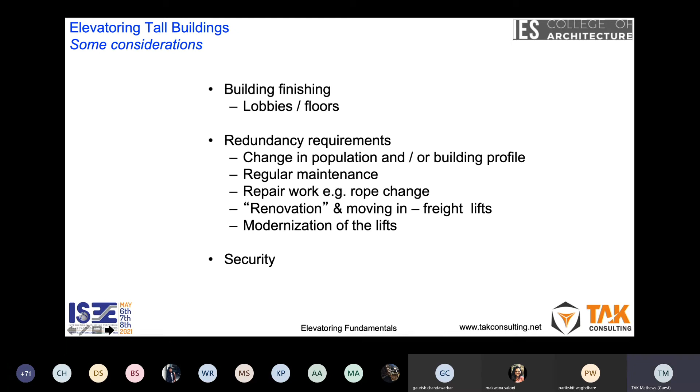Redundancy requirements always need to be kept in mind. The taller the building, the more complicated. Even regular maintenance takes that much more time, so your elevators will be shut down for that much longer. Security again becomes a concern. And remember that despite all your protection equipment that you have for an elevator, there's nothing that can be done to stop tailgating.

Okay, so fireman evacuation elevators, I'll rush through this. I will not rush through this. The rest part I'll rush through.

Remember always that elevators are not waterproof or fireproof. I'm starting with waterproof. Water will kill it first. But because of the fire-resistant doors, it is fireproof to some extent. And it's an architect's role to ensure that the elevator is protected from water, fire, and smoke. Again, if you look at the National Building Code, Part 4, they sort of give a good idea as to how it should be like.

Again, a question that will come up, probably over the next couple of sessions that you do, there will be this question about hoistway pressurization. If you do look at the National Building Code again, this is Part 4, not Part 8, Section 5A and 5B. It says that in the eventuality you don't have an elevator lobby, that the lift opens up into an open area, or an air-conditioned building where it's an open corridor, like it opens up into a flat, then you might need to consider hoistway pressurization.

Otherwise, hoistway pressurization in many ways is a superfluous requirement, because what will first impact your elevator is the water, then the fire, and the last thing is the smoke. Unfortunately, most of the buildings, the design focus is on pressurizing of the hoistway, which, like I said, is superfluous, in addition to which it has a potential of creating problems. One of the requirements that we have for hoistways is to have a smoke window for extraction of smoke in the eventuality there is a fire inside the hoistway.

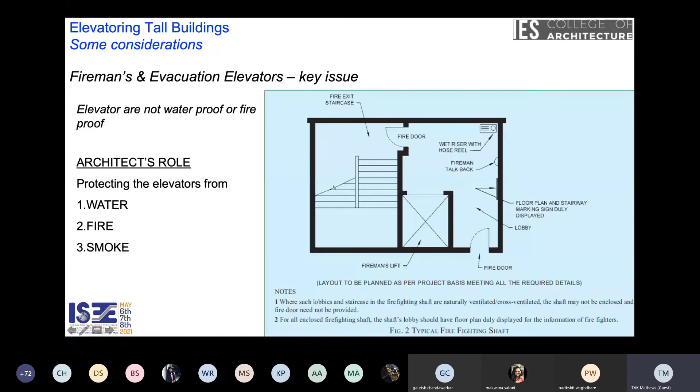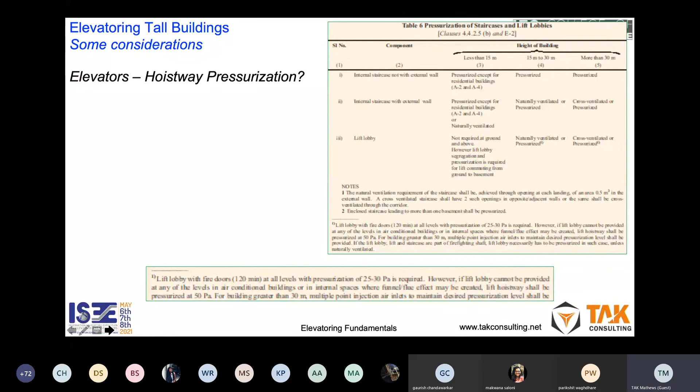There are lots of experts, and I've been talking about this for more than 10 years with various experts. At the panels and the discussions, they all agree to what I'm saying. But finally, when the designers come in, they say, no, we have to put in pressurization fans. If you look at the National Building Code, it is very clear. It vindicates my stand in terms of the fact that pressurization of the hoistway is something which is superfluous, unless you have a specific requirement. And again, the other thing that would vindicate it is the Burj Khalifa, not a single hoistway is pressurized.

Standards and codes. We do have standards and codes. In many ways, our standards, we do have a tendency of saying that Indian standards are weak.

Except for the escalator standards, in many ways our standards are fairly adequate and fairly strong. There are international standards - ISO 8100, EN 81, EN 115, the European norm. You've got the Japanese industrial standards, you have the American standards. I think barring the American standards, probably in many ways our elevator standards are more stringent than the international standards.

The National Building Code we have is also a fairly fine document. I'm not saying that because I'm the convener. The section on planning for buildings is something that you will probably find only in the National Building Code and nowhere else. The closest you will find would be CIBSE Guide D, nowhere else.

So to conclude, it's essential that as architects you recognize that elevatoring is not based on thumb rules. This is a very crucial science. It's not just that you put in and say, okay, let me put in so many elevators. Remember, Gina Barney, for instance, this book - she has researched for more than 50, 60 years. This is her second edition of this particular book, but her third book on traffic analysis. George Strakosch, the late George Strakosch who has passed away, spent more than 60 years of his lifetime on elevators and traffic analysis. We have the National Building Code.

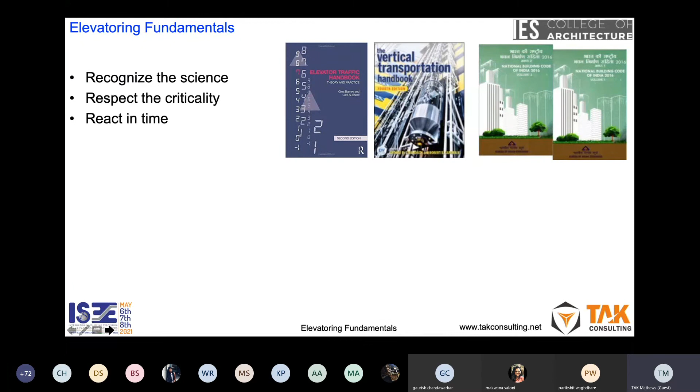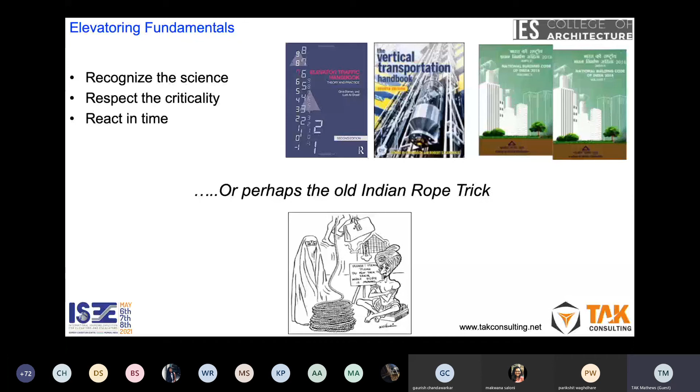React in time. If you have not set this right when you are at the drawing board stage of the building, the moment it gets into a building approval plan or situation like that, it's too late. There's really nothing that you can do after that. So we come across these kind of buildings and they always say, now what do we do? I say, well, possibly the only thing that is left is the old Indian rope trick. Of course, demolishing the building is the other alternative - demolish and rebuild with a better plan. Otherwise, the only alternative you have is probably the old Indian rope trick.

So with that, I will stop and open it up for questions.

Thank you, Mr. Mathew. Any questions from the student side? Yeah, Abdul. Yeah, Qadir. Hello, sir. Yes, sir. Sir, my name is Abdul Qadir.

So my question is, you talked about the speed of the lift and how the speed should be convenient in terms of the passenger - it should be fast, but should also have some sort of convenience when you're traveling. So what about the acceleration of a lift when it starts and achieves, for example, a speed of 10 meters per second? And what kind of acceleration? Because I think that stage will be more critical than the speed when it's uniform.

The acceleration - I will just put that back on the slide. So your maximum acceleration is 1.5 meters per second squared. You also need to keep in mind that the change of acceleration also makes a difference. 1.5 is what probably the Americans or Europeans will handle. We Indians will not be able to handle it. 1 meter per second squared, or 1.2, is what we Indians can manage. The Japanese, for instance, will normally never go above 1 meter per second squared in terms of acceleration. So what you pointed out is very right.

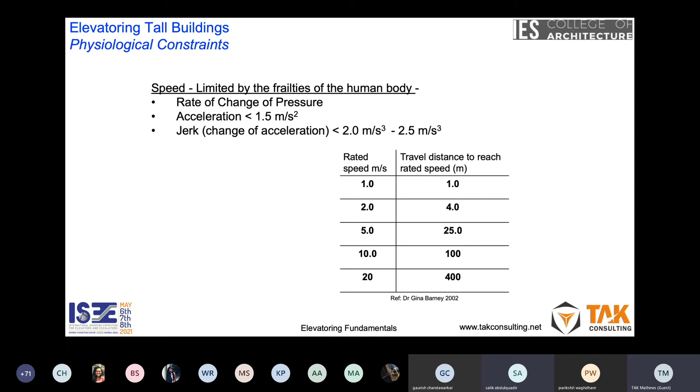Yes, sir, so if it had been gradual, the change of pressure - like people who go to climb a mountain, they go gradually up, they don't rush up. Right, so it is acceleration, which is not the acceleration on its own, it's the acceleration impacted by pressure. So if the acceleration, suppose it had been horizontal, you would not have had the same issue. Right, yes sir, right?

Thank you, sir. You're welcome. Any more questions?

Sir, I have a question regarding nowadays for tall buildings, we have so many panoramic lifts. Can you highlight the features of those panoramic lifts for tall buildings?

The tallest panoramic lifts, I believe, have been put up in Dubai. One issue is acceleration and the impact of the change of pressure. If you're in a closed car, the impact of speed is less because you can't see out. But if you can see out and the speed is high, it's very uncomfortable for passengers.

I myself am a person who has motion sickness, and it's pretty hilarious that despite being in the elevator business, I also have a fear of heights. There are many people who have a problem with these panoramic elevators in tall buildings.

Second, if it's a panoramic elevator exposed to the outer surface, you have claddings outside and a facade that is put up. These facades have horizontal members to support the structure, so as you're going up, the supports start cutting your view. Depending on how fast the elevator is, the more impact it has on the users.